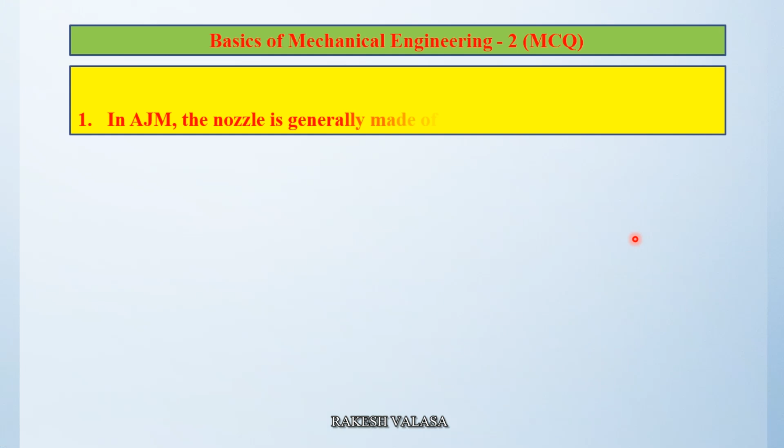Question 1. In AJM, the nozzle is generally made of: A) Low carbon steel, B) WC tungsten carbide, C) Stainless steel, D) HSS.

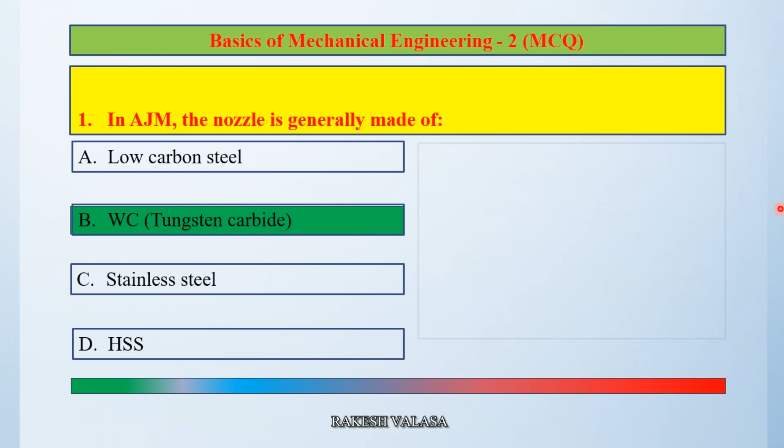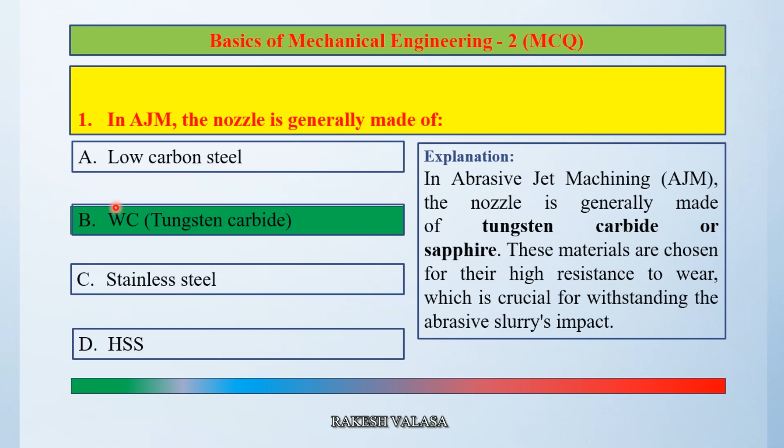The correct answer is option B, WC tungsten carbide. In abrasive jet machining (AJM), the nozzle is generally made of tungsten carbide or sapphire. These materials are chosen for their high resistance to wear, which is crucial for withstanding the abrasive slurry impact.

Question 2. In abrasive jet machining, as the distance between the nozzle tip and the work surface increases, the material removal rate: A) increases continuously, B) decreases continuously, C) decreases, becomes stable and then increases, D) increases, becomes stable and then decreases.

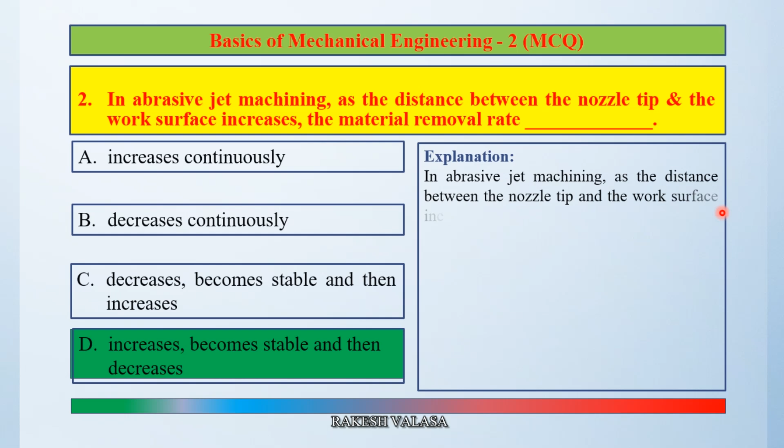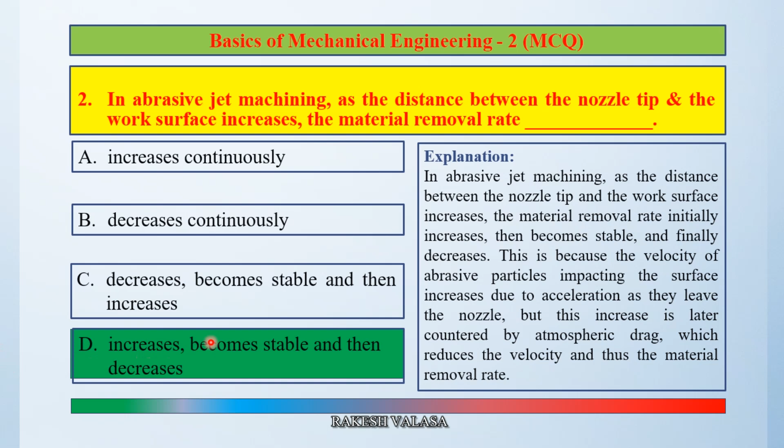The correct answer is option D, increases, becomes stable and then decreases. As the distance between the nozzle tip and work surface increases, the material removal rate initially increases, then becomes stable, and finally decreases. This is because the velocity of abrasive particles increases due to acceleration as they leave the nozzle, but this increase is later countered by atmospheric drag, which reduces the velocity and thus the material removal rate.

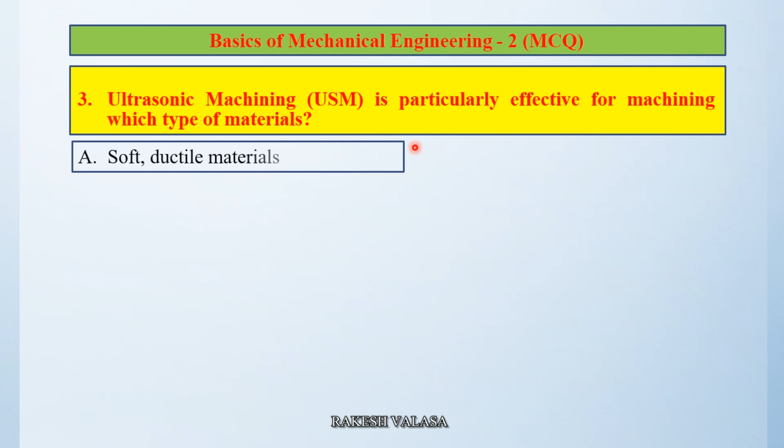Question 3. Ultrasonic machining is particularly effective for machining which type of materials? A) Soft ductile materials, B) Thermoplastics and polymers, C) Hard and brittle materials such as ceramics, D) High strength ferrous metals.

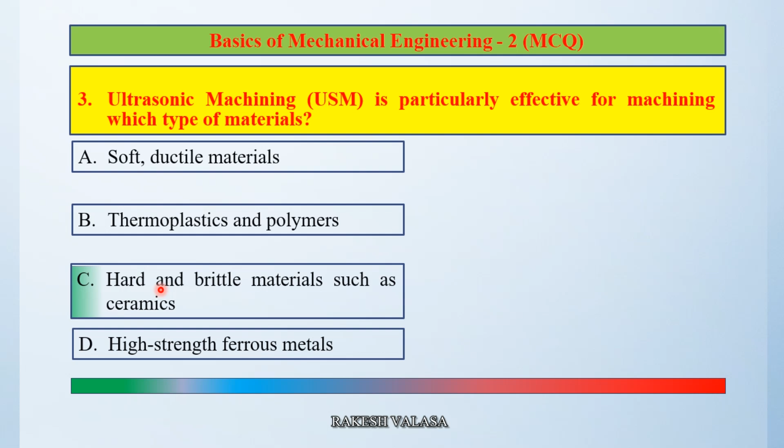The correct answer is option C, hard and brittle materials such as ceramics. Ultrasonic machining is particularly effective for machining hard and brittle materials because the process relies on abrasive particles to create micro cracks that propagate and cause material removal through brittle fracture. It is well suited for materials like glass, ceramics, and some hard metals that are difficult to machine using conventional methods.

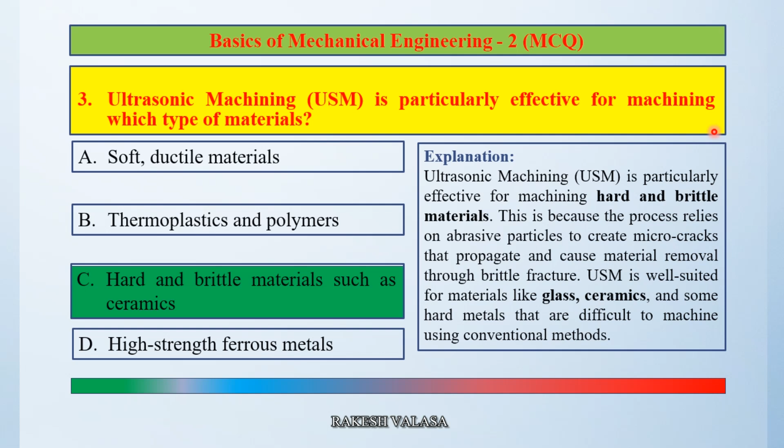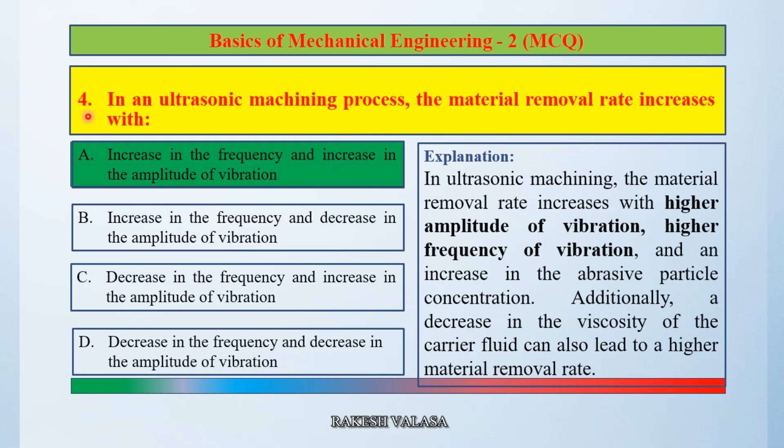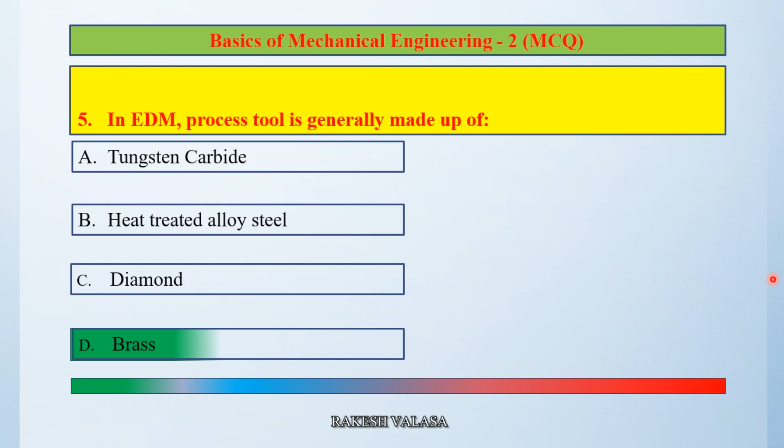The correct answer is option D, brass. In electrical discharge machining, tool materials used for the electrode often include copper, brass, graphite and their alloys. Other materials like tungsten, silver and tungsten carbide are also used, particularly in specialized applications. The choice of material depends on factors like the desired material removal rate, tool wear rate and the specific application.

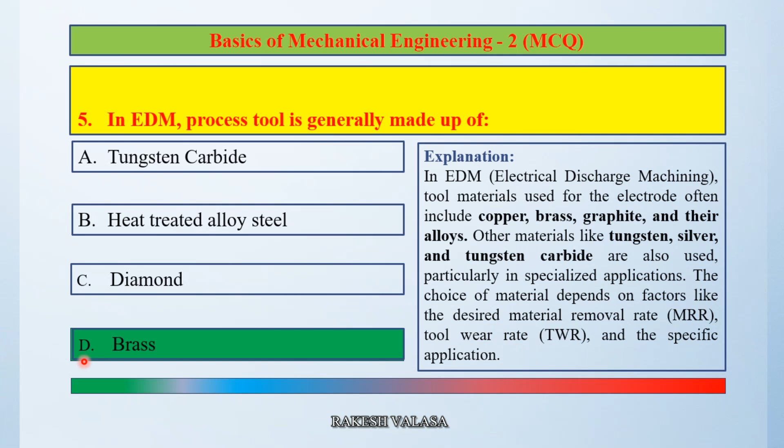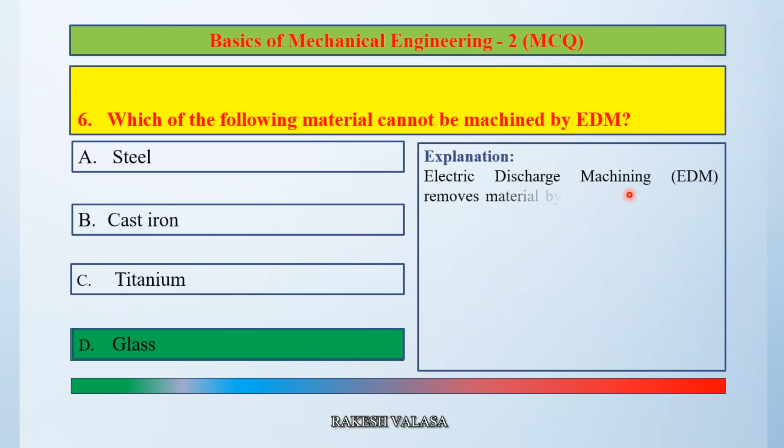The correct answer is option D, glass. Electric discharge machining removes material by creating tiny electrical sparks between an electrode and the workpiece. These sparks melt and vaporize the material, effectively cutting it. Insulating materials like glass, plastics, and ceramics cannot be machined effectively using EDM because they do not conduct electricity, which is essential for the process to work.

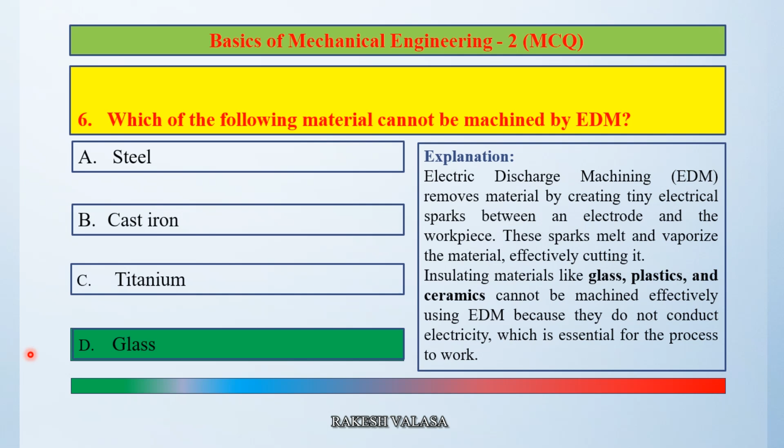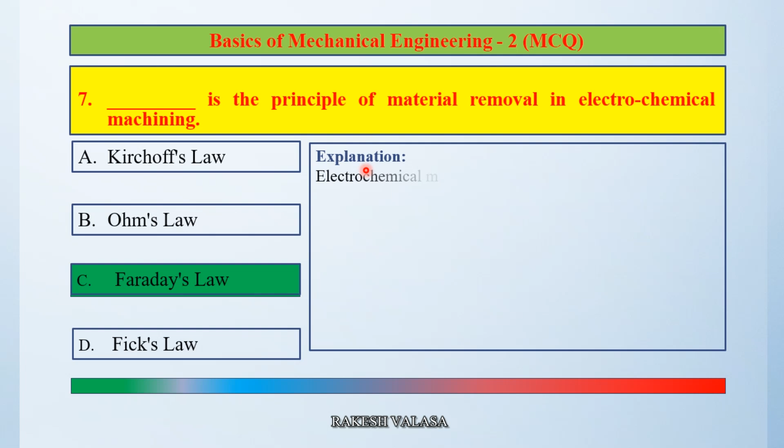The correct answer is option C, Faraday's law. Electrochemical machining is based on the electrolysis process, which is governed by two laws proposed by Faraday. First, the amount of chemical change produced by an electric current, that is, the amount of any material dissolved or deposited, is proportional to the quantity of electricity passed. Second, the amounts of different substances dissolved or deposited by the same quantity of electricity are proportional to their chemical equivalent weights.

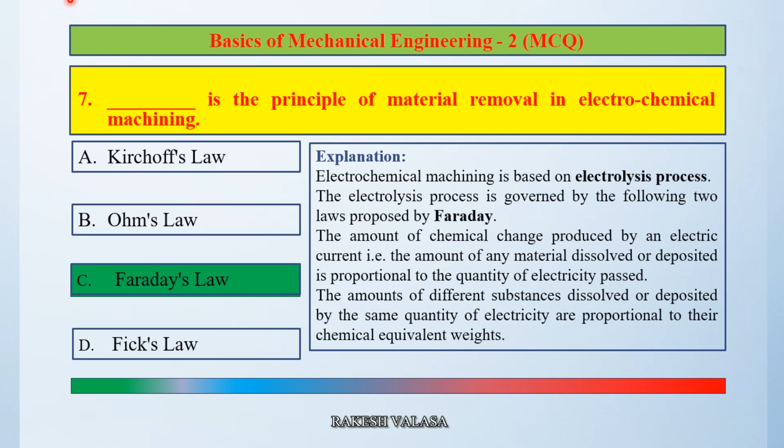Question 8. In electrochemical machining, the material removal is due to: A) ion displacement, B) corrosion, C) fusion, D) erosion.

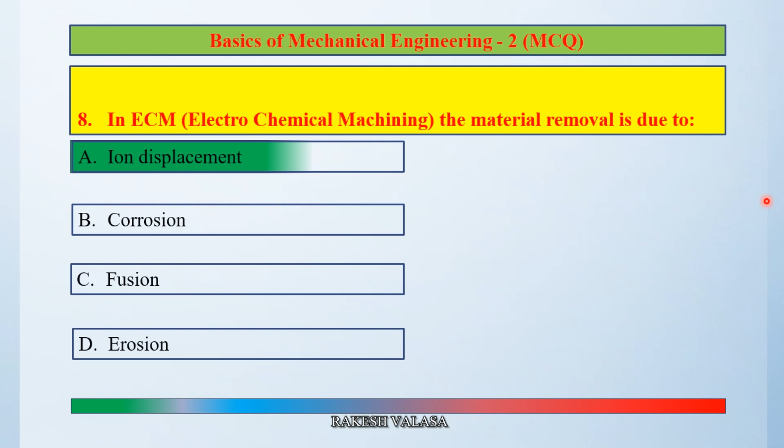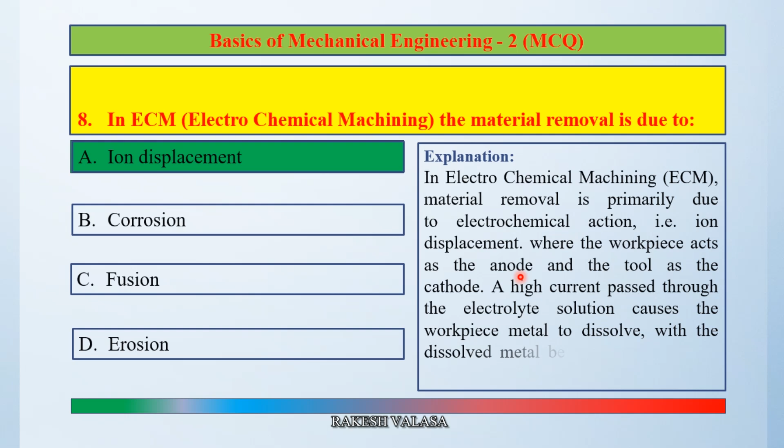The correct answer is option A, ion displacement. In electrochemical machining, material removal is primarily due to electrochemical action, that is ion displacement, where the workpiece acts as the anode and the tool as the cathode. A high current passed through the electrolyte solution causes the workpiece metal to dissolve, with the dissolved metal being carried away by the electrolyte.

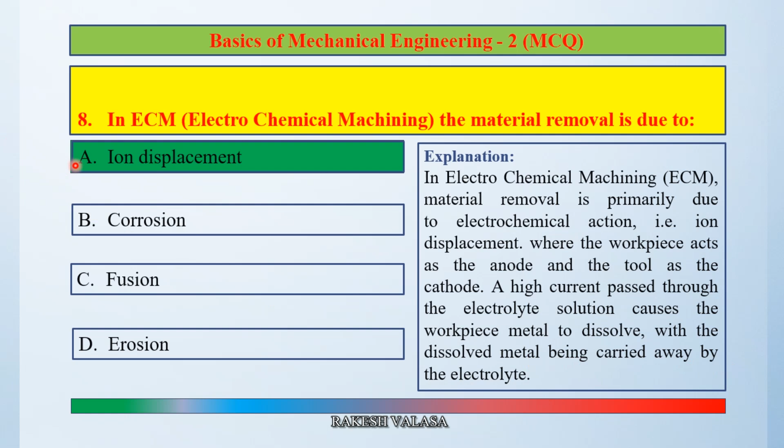Question 9. A ____ light beam is focused optically for a particular period of time in laser beam machining. A) Coherent, B) Consistent, C) Both of these, D) None of these.

The correct answer is option C, both of these. A coherent light beam is characterized by light waves that maintain a fixed phase relationship, meaning their crests and troughs are aligned in a synchronized manner. A consistent light beam, often referred to as a coherent light beam, is characterized by having a constant phase relationship between the electromagnetic waves within it.

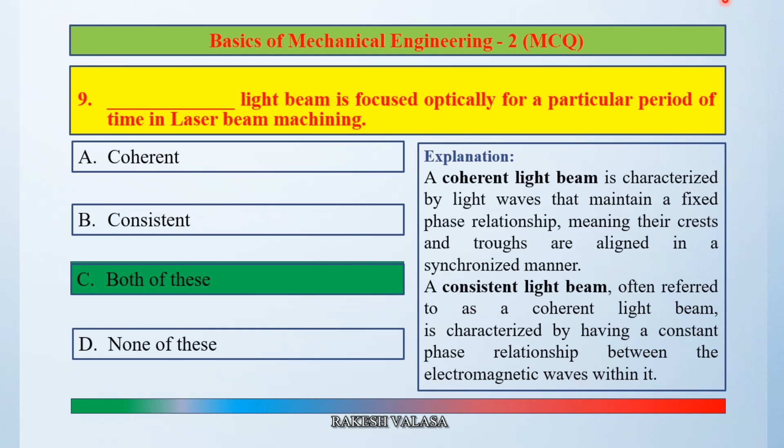Question 10. Laser beam machining is classified as a ____ type of non-traditional machining process. A) Electrochemical, B) Chemical, C) Mechanical, D) Thermal.

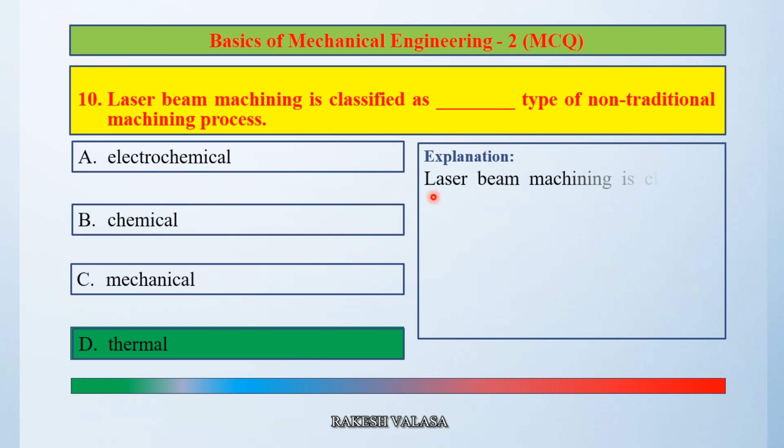The correct answer is option D, thermal. Laser beam machining is classified as a thermal type of non-traditional machining process. It utilizes the intense heat of a focused laser beam to remove material from a workpiece through melting, vaporizing, and high-speed ablation.

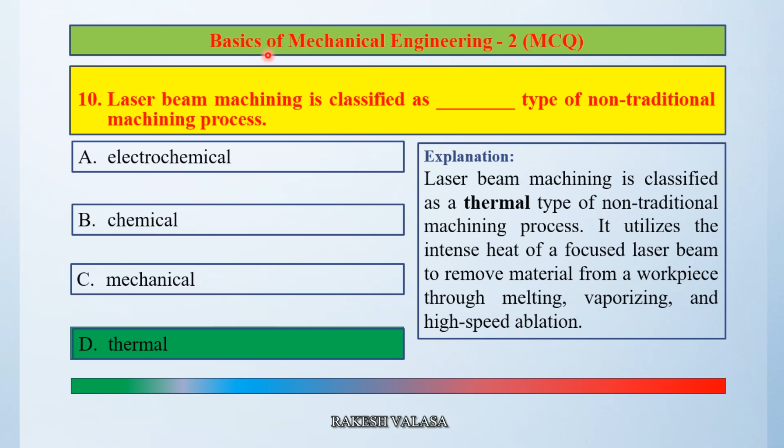In the next video, we will discuss week 12 answers for Basics of Mechanical Engineering 2 in the NPTEL course.